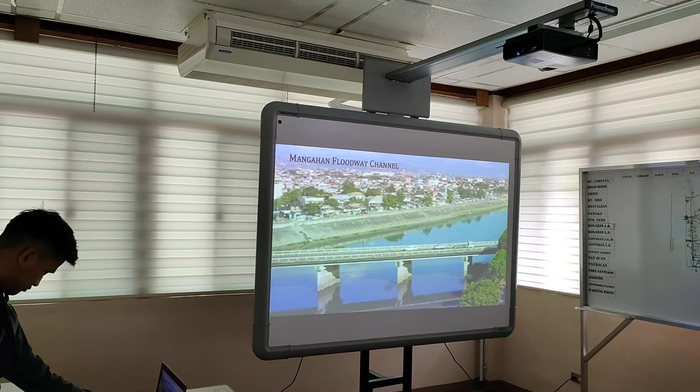The Mangahan Floodway Channel diverts excess flood water flowing into the Marikina River towards the Laguna Lake for temporary storage, to limit floodwater in the lower Marikina River to bankfull capacity. The channel also allows reverse flow from the lake to the river.

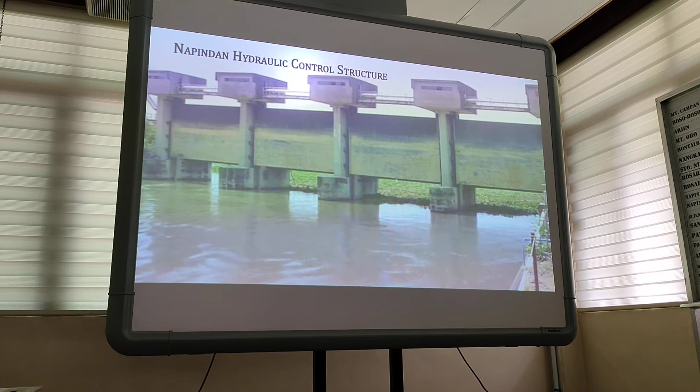The Napindan Hydraulic Control Structure, on the other hand, was built to improve the water quality entering the Laguna Lake by preventing the backflow of saline and polluted water from the Pasig River, especially so that the lake can be utilized for aquatic resources and to some extent for agricultural purposes.

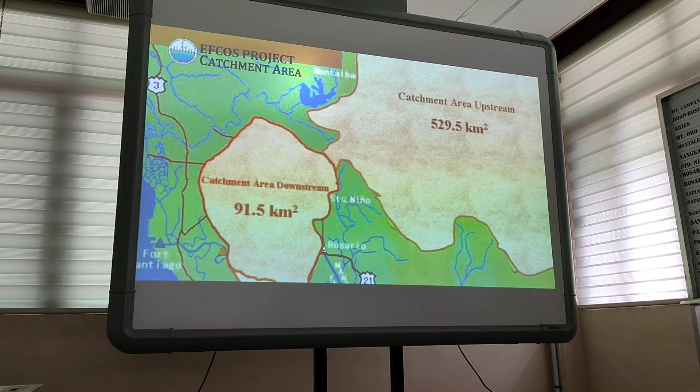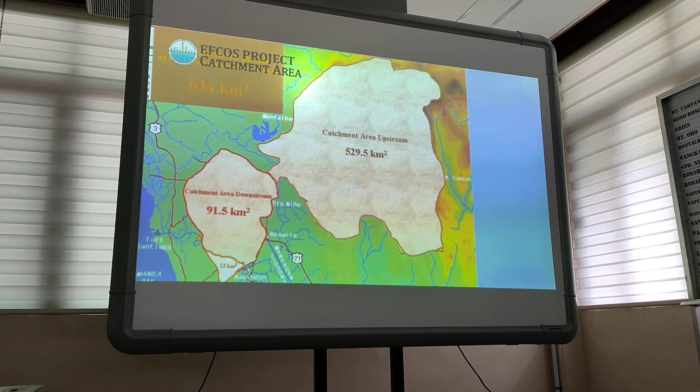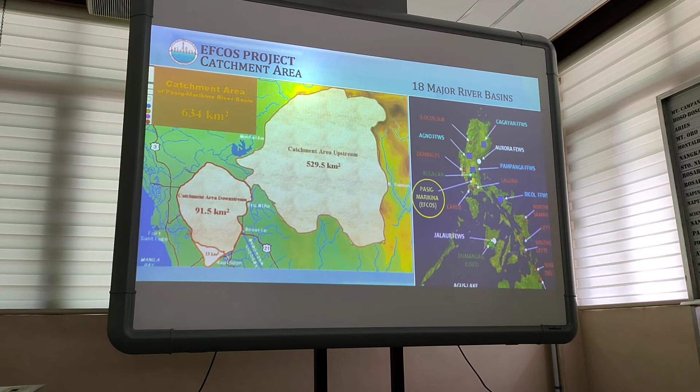The catchment area of the EFCOS project is divided into two: the Upper Marikina catchment with a total area of 529.5 square kilometers, and the Lower Marikina catchment with a total area of 91.5 square kilometers. The catchment areas are parts of the Pasig-Marikina River Basin, which is one of the 18 major river basins in the Philippines. The EFCOS project system monitors the rainfall activity within the project area.

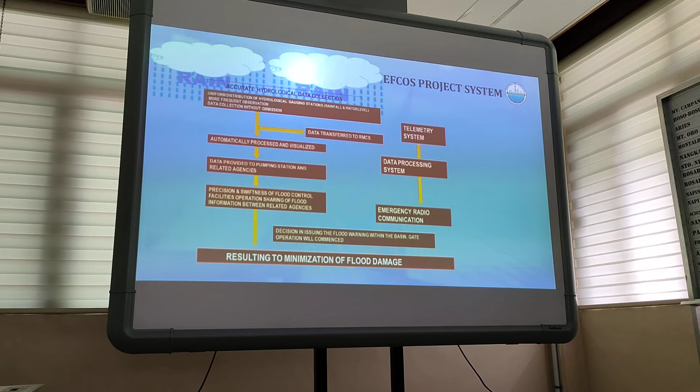The gauging stations collect the real-time hydrological data transmitted to the Rosario Master Control Station. The flood information is visualized and the output is shared and transmitted to the concerned agencies and other flood control facilities. In the 2002 rehabilitation, the data are transmitted by a simplex radio system using emergency radio and telephone communication.

Once the Rosario Master Control Station has the real-time flood information, the decision to issue flood warning within the basin is given to the hydrologist, who makes the command to conduct gate operation based on set protocols in order to divert water flow through Mangahan Floodway to minimize flood damage.

The EFCOS Project Phase 1 was started in 1985 and completed in 1993 through a loan package under the Overseas Economic Cooperation Fund, or OECF, amounting to 254 million pesos. The system, which uses analog telemetry, is for monitoring and is not capable of flood forecasting.

There were two rainfall gauging stations, which measure the amount and intensity of precipitation and determine its beginning and ending time: one in Mount Oro, located in San Isidro, Montalban, and another one in Boso Boso, located in Antipolo.

Complementing these two rainfall gauging stations are 9 water level gauging stations located along the Pasig-Marikina River, which record the height of water surface in the stream. They are Montalban, Santo Niño, Rosario Junction Side, Rosario Lakeside, Angono, Napindan Junction Side, Napindan Lakeside, Pandacan, and Fort Santiago, which are capable of transmitting real-time flood information on an hourly basis.

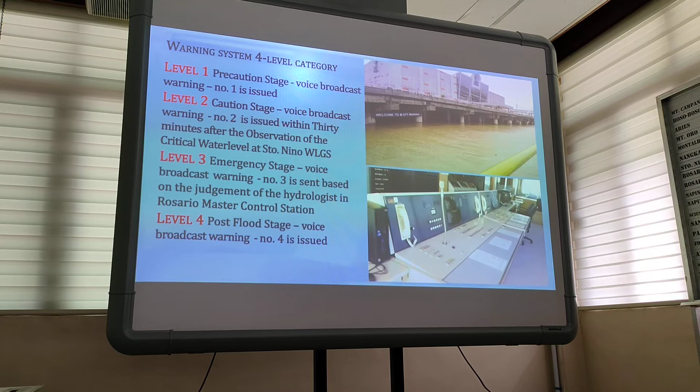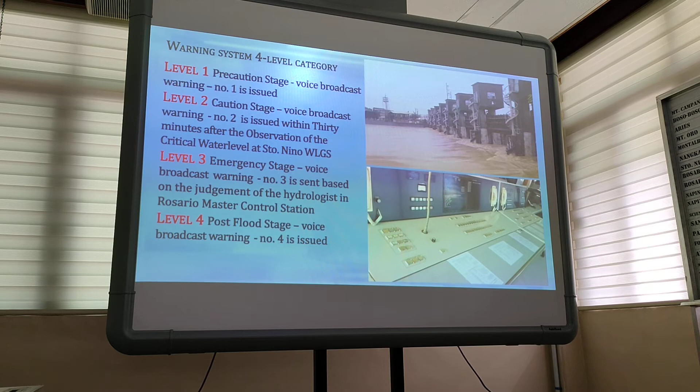There are 4 levels of warning system. Level 1 is the precaution stage: all gates are closed, and voice broadcast warning 1 is issued. Level 2 is the caution stage: voice broadcast warning number 2 is issued within 30 minutes after the observation of the critical water level at Santo Niño Water Level Gauging Station.

Level 3 is the emergency stage: voice broadcast warning number 3 is issued, based on the judgment of the hydrologist in Rosario Master Control Station, as the floodway is expected to rise due to large volume of water coming from upstream of Marikina River.

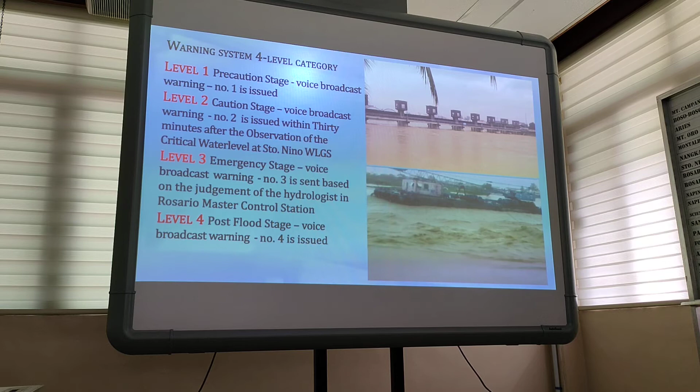Level 4 is the post-flood stage: voice broadcast warning number 4 is issued as the water in the floodway is decreasing, but caution is given to the people because of the possible occurrence of flood.

A discharge warning from the Rosario Master Control Station. The release of floodwater shall now commence through the Rosario floodgates. The level of water will soon rise and its flow will gradually become swift. The public is advised not to go near the floodway channel for your safety.

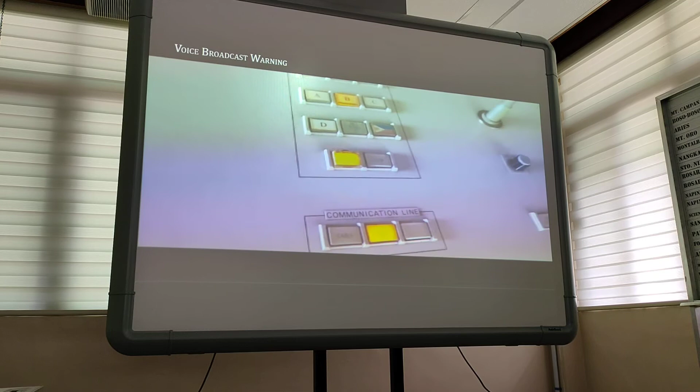Lastly, relay and monitoring stations were also constructed in Antipolo, Pag-asa Science Garden, and Rosario Master Control Station, which will enable sharing of vital flood data on an hourly basis to other key agencies handling flood information data.

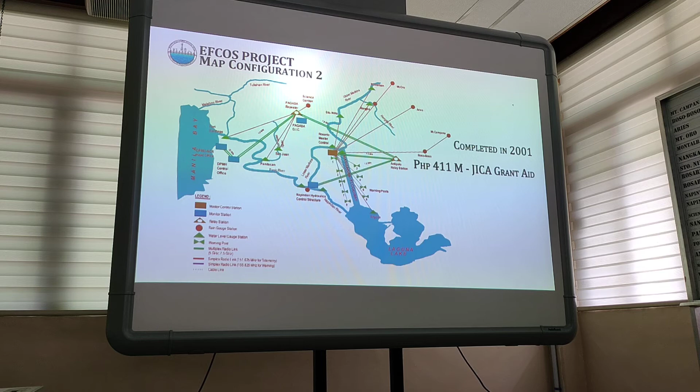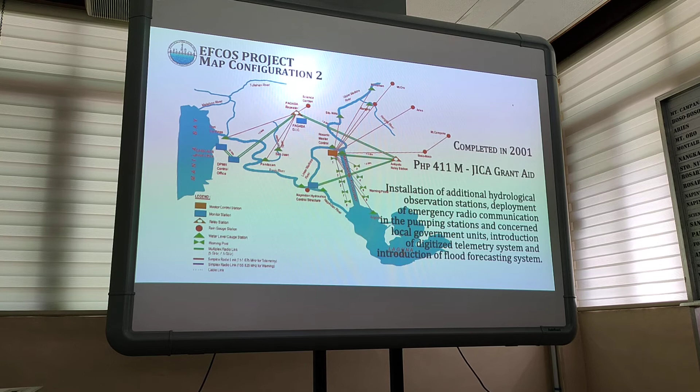Realizing the limitations of EFCOS Project Phase 1, Project Phase 2 involving systems upgrades was done in 2001 through a Japanese government grant facility amounting to 411 million pesos through the Department of Public Works and Highways. This included the installation of additional hydrological observation stations, deployment of emergency radio communication in pumping stations and concerned local government units, the introduction of digitized telemetry system, and the introduction of flood forecasting system.

Specifically, an additional 5 rainfall gauging stations were constructed, located in Mount Campana, Mount Aries, Nangka, Napindan, and Science Garden, while 2 more water level gauging stations were placed in Nangka and San Juan.

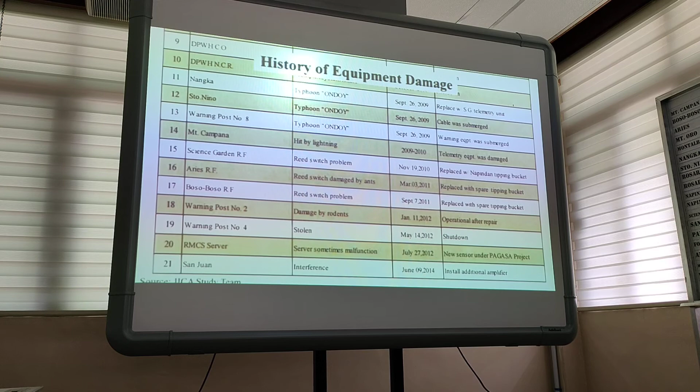However, through the years starting 2006, equipment failures and malfunctions due to wear and tear, as well as usual depreciation, were experienced. Worse, the system experienced data absence, particularly in the downstream area, after the occurrence of extreme weather events such as Typhoon Ondoy and Neneng, wherein vital stations were severely damaged. Lightning even damaged the microwave and multiplex communication in Antipolo Relay Station.

Despite interest from funding agencies to rehabilitate EFCOS, it was only in 2013 that MMDA submitted the EFCOS Project Phase 3 rehabilitation proposal to the government of Japan, which was approved for funding in 2014 under the Technical Cooperation Program of the Japan International Cooperation Agency.

The rehabilitation, which ran for 18 months and was completed on February 19, 2016, focused on the immediate restoration of the damaged EFCOS equipment caused by extreme weather events.

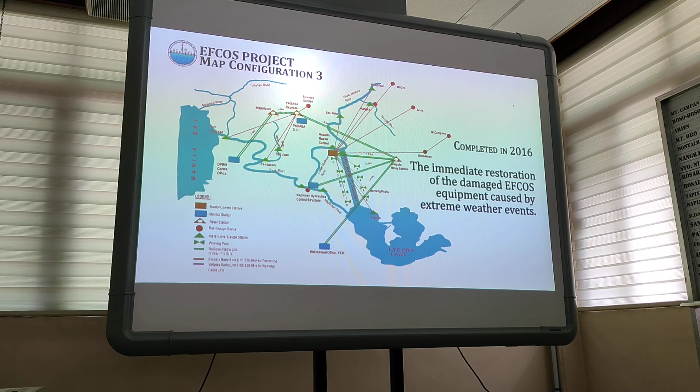For the first time, the MMDA was able to secure a National Telecommunications Commission radio station license, which will operate under the 150 MHz assigned frequency.

The Rosario Master Control Station houses the brain of the system. It is composed of telecommunication, telemetry and warning equipment, as well as an advanced computer system with flood forecasting capability.

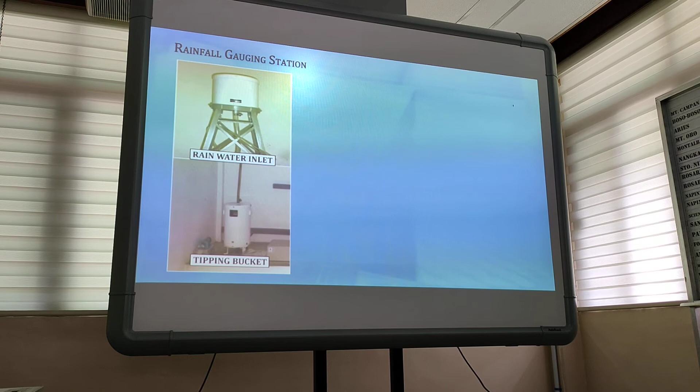The rainfall gauging station houses the tipping bucket that measures the intensity of precipitation or rainfall. This device is connected to the telemetry and transmitted to Rosario Master Control Station via very high radio frequency.

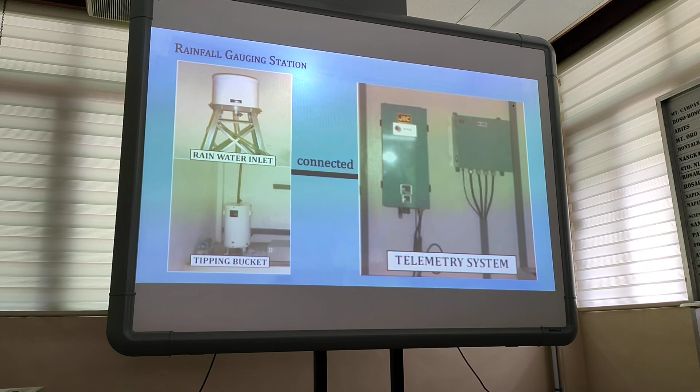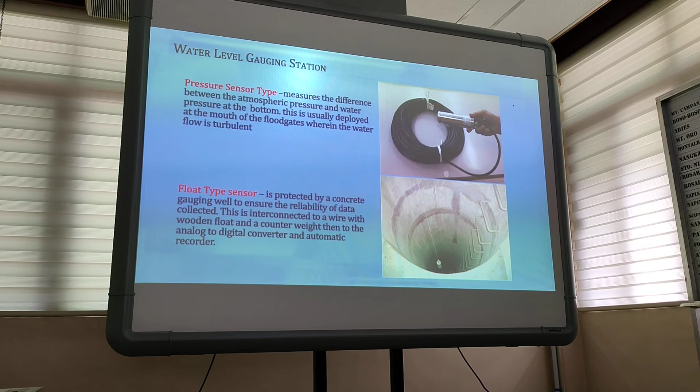The water level gauging station houses the water level device that can predict the rise and fall of the water level at a specific river. EFCOS has two types of water level sensors, the pressure sensor and the float type sensor, which are both connected to a telemetry system and transmitted in real time to Rosario through very high radio frequency.

The Antipolo and Pag-asa relay stations served as relay points for the multiplex communication system of the EFCOS project.

The warning system alerts and warns residents along the floodway before, during, and after the opening of the floodgates. LCD panel displays were installed in all warning posts, except in warning post numbers 4 and 8, wherein new warning equipment was installed because the old warning equipment was fully submerged in water.

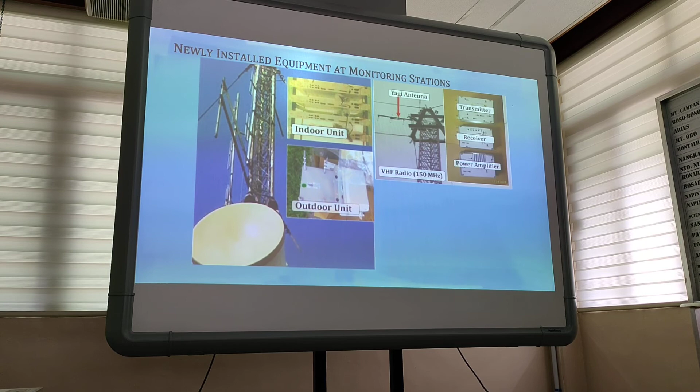Also part of the rehabilitation works is the replacement of new microwave antennas, which use very high radio frequency under the 150 MHz assigned by the NTC. IP radios were also installed in relay and monitoring stations, while VHF radios were installed in gauging stations and warning stations. The DMP equipment and the rest were installed in rainfall and water level gauging stations.

Monitoring stations were also improved with the installation of telemetry equipment, computer system, printer, and a display panel to share the EFCOS data with other agencies who handle flood-related issues in Metro Manila. To ensure open communication among the monitoring stations, the system also installed a voice-over IP, which can be used especially during operations.

The flood forecasting component of the EFCOS project complements the synchronized operation of the Rosario Weir floodgates and the Napindan hydraulics control structure.

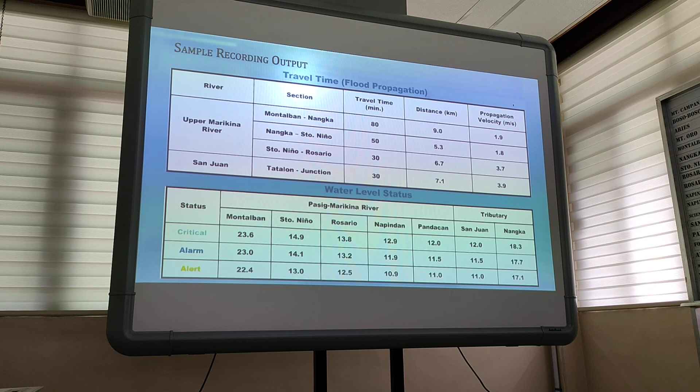Currently, the forecasting tool can be used for the gate operations of the Rosario Weir. The table shown is a sample recording output, which presents the propagation and travel time of floodwater going downstream. It also included the water level status, such as alert, alarm, and critical level, in the water level gauging stations along the Pasig Marikina Laguna Lake Complex.

The gate operation rule curve, on the other hand, serves as a guide for hydrologists to ensure proper gate operation and discharge of floodwater towards the Laguna Lake. The gates are gradually opened based on the amount of rainfall intensity observed within the catchment area.

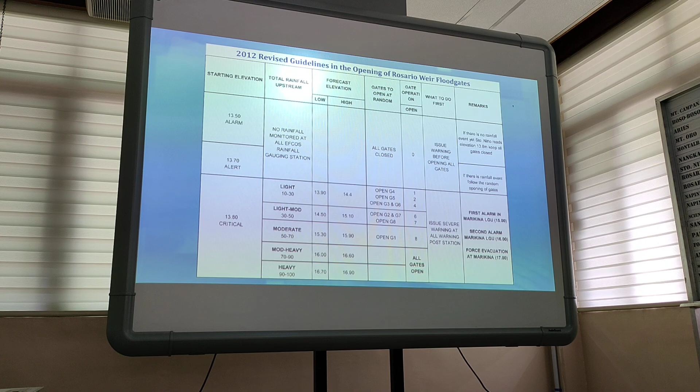In 2012, the gate operation rule curve was revised because the river bathymetry had changed and a lot of constrictions were observed. The opening and closing of floodgates at the Rosario Weir will be based on the observed water elevation at the control point, which is the Santo Niño water level gauging station.

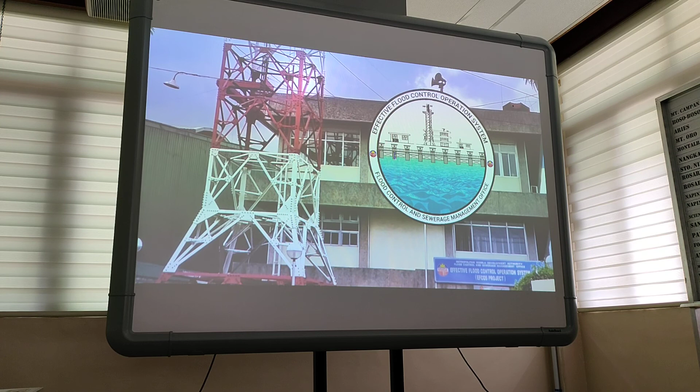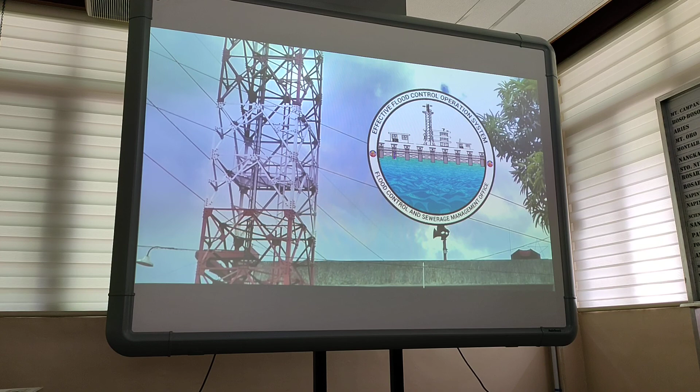With the completion of the restoration works of the telemetry system and the replacement of the radio system working under the 150 MHz NTC assigned frequency, among others, the improved EFCOS is now capable of utilizing rainfall and water level data better and more efficiently. This will no doubt help Metro Manila become more prepared, thereby minimizing flood damage, saving more lives, and safeguarding properties, with the end view of protecting the economy in general to pursue growth and development in the greater Metro Manila area.